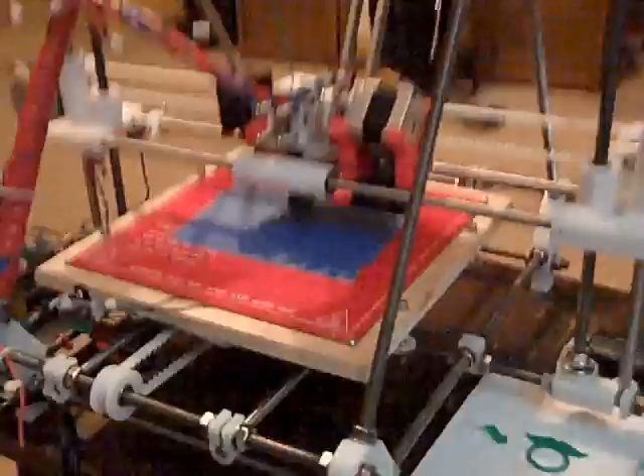Okay, what I'm printing here is a nut. It's in this green PLA, 1.75 millimeter.

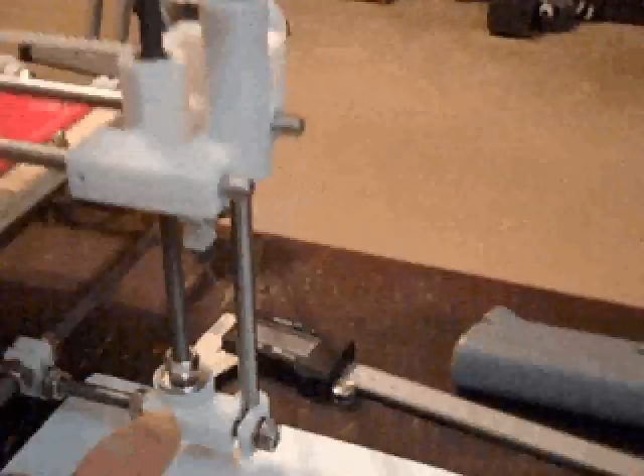From my last video I was talking about adding some jam nuts here to thrust against this bottom bearing. I've installed those on both sides.

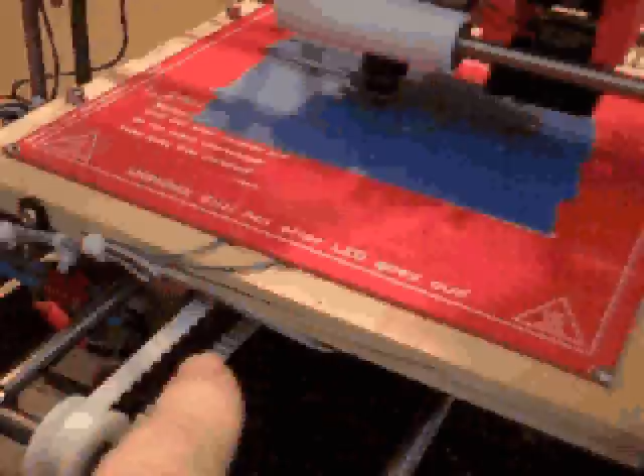I've also got the heat bed wired up and it's working. It's currently at 60 degrees Celsius.

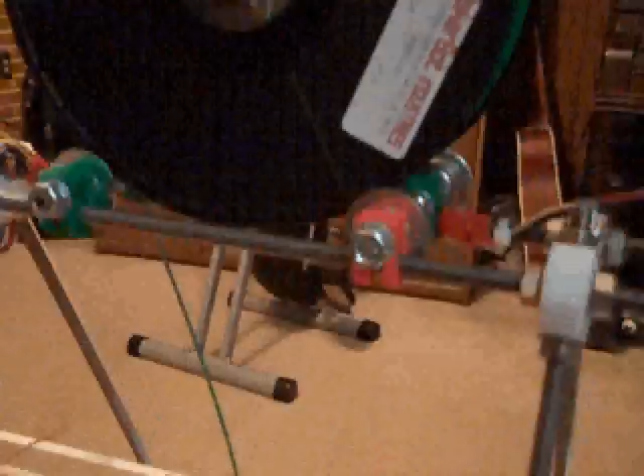I've also created a despooler mechanism up here on top. I've used these rod couplers that were printed in PLA, and I've used some 608ZZ bearings in here, letting the edge sit on those bearings with fender washers on the outside of the spool, so it'll keep it keyed in place. This overhang on the rear of the rods is to allow for expansion.

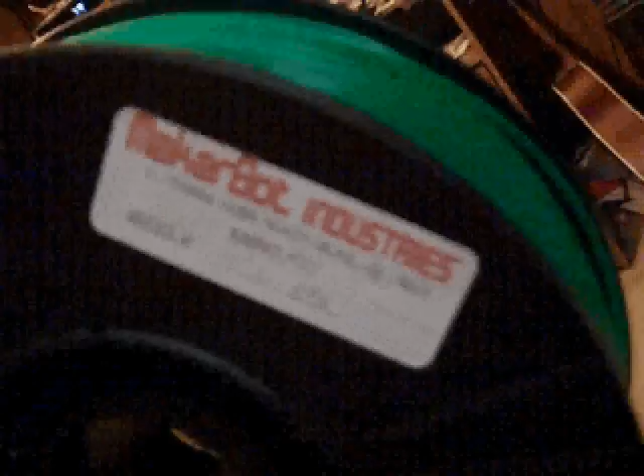This particular spool is from Makerbot. It comes 3 inches by 8 inches in diameter, 3 inches wide. The Makergear spools, which hold 5 pounds of filament, are 4 inches wide and 11 inches in diameter.

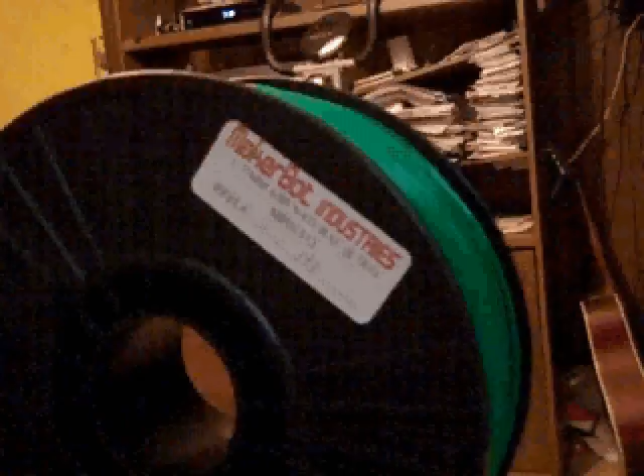So that's the difference in currently using this spool, which actually is full of natural colored ABS. I just wound this PLA on top of it so I could test to make sure this thing would work. And it is rolling, so it looks like it's doing good.

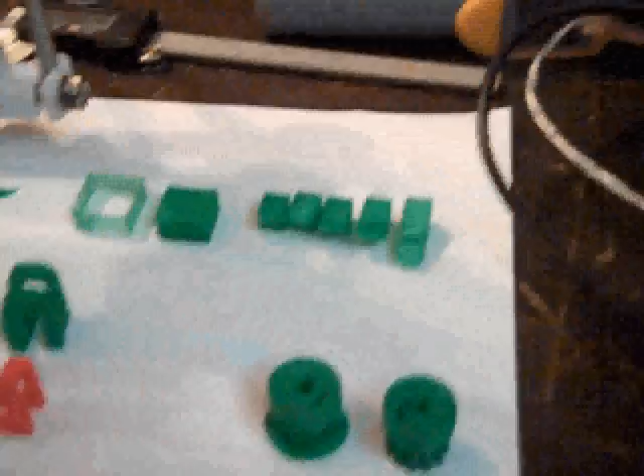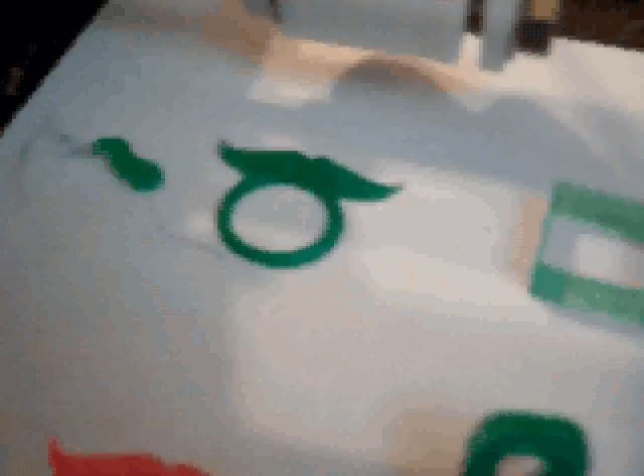I've also got a little display here of previous prints. I mentioned the mustache ring, and actually this little gob up here in the top left was my actual first print, which ended up being a disaster. It was no good whatsoever.

And then I did print a mustache ring, but there was a little flash towards the mustache portion and the ring itself on the left side, and it left the tops and the sides sort of rounded. It's concentric though on the circle, but it didn't satisfy me, so I did print this one in red. I'll talk about it in a second.

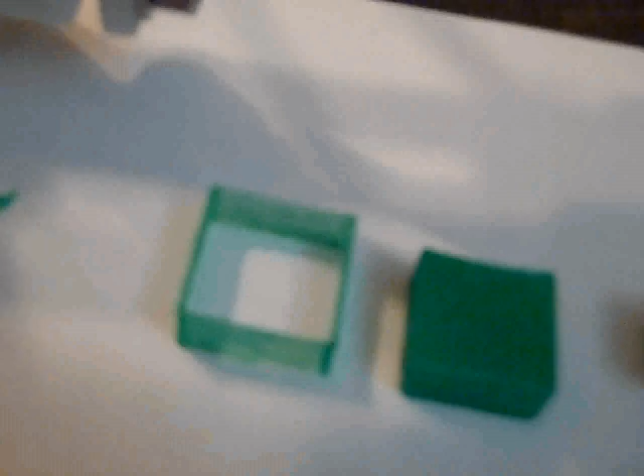Then I went to reprap.org wiki, reprap.org/wiki/calibration, and found a 0.5 millimeter square, and it ended up being like 0.65 millimeter in diameter.

This is a 20 millimeter calibration cube, and it came out really good. It's slightly less than 20.

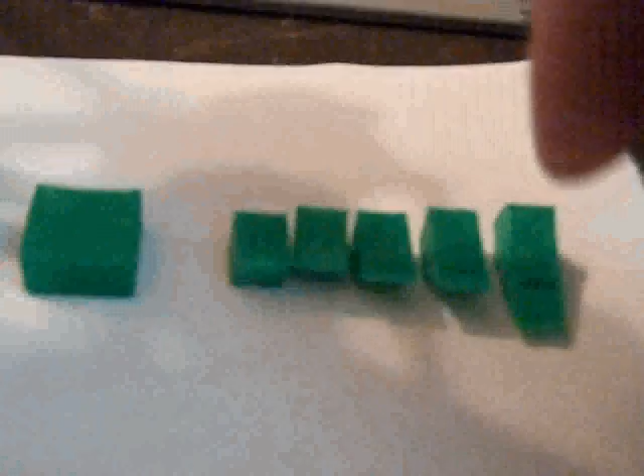And these 5 were printed all at the same time as one print. They are overhang check overhangs, and the way they print is like this. You can see how rough underneath this is, because it's never supposed to print beyond 45 degrees, and that's probably about 60. I think the 45 is right here in the middle, and that one printed fairly decently.

If you can see the reflection of it, it's fairly smooth. But anyway, these were all 5 printed at the same time.

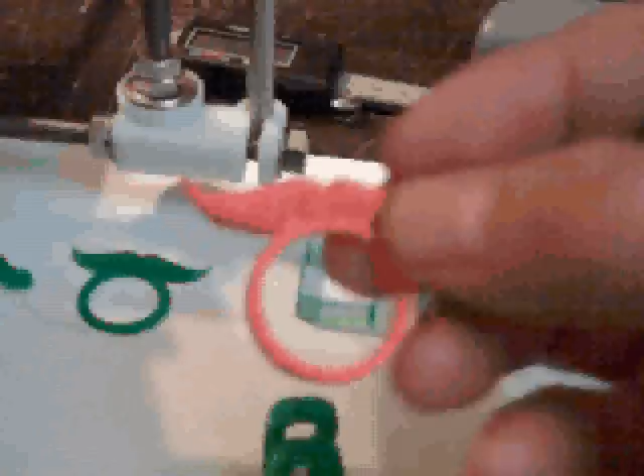I mentioned the mustache ring. Now this one came out, the top is flat, the sides are flat, the contour of the mustache itself is really good. I'm not sure if I'm in focus or not, but anyway, comparing this with the first one, this one came out really good.

These right here are broken because they're PLA, they're not that flexible. And I tried to use them up here on this right here.

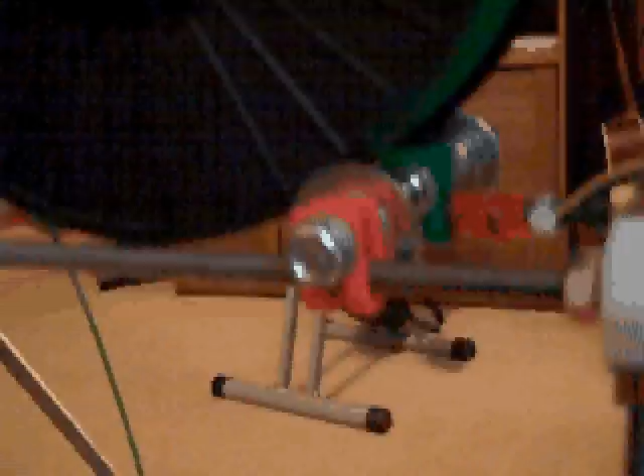Now, right after this, I did print these little babies, the fan mounts. One guy that has this same Brutstruder type system found his PLA was actually melting just beyond the drive mechanism, the gear and the pinch bearing right below there. He was having trouble. It was getting too hot.

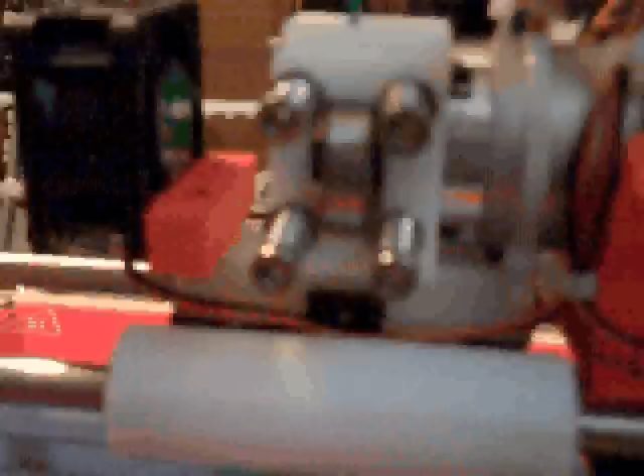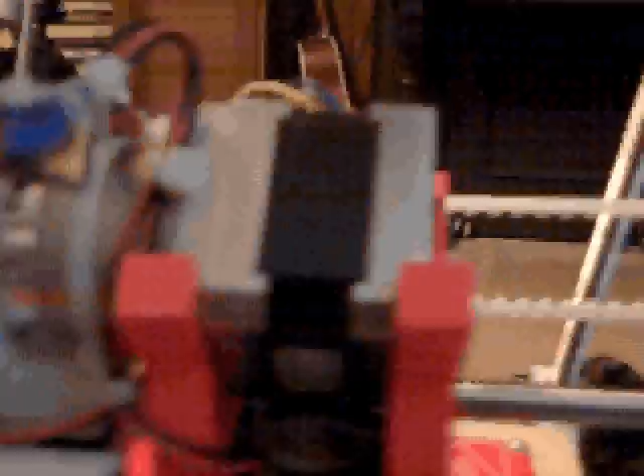He was doing some very long prints, so I decided to put a fan blowing right into that hole where the gear is. Also, he seemed to think the motor temperature was actually going through the gearbox, which is an all-metal design, so I decided to cool the motor off too, so I put a fan underneath the motor.

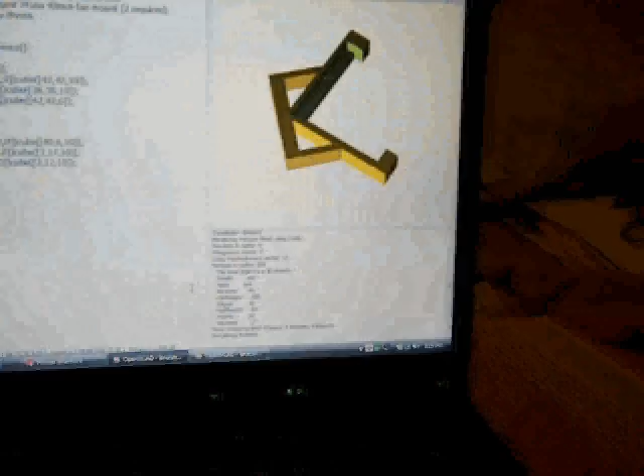Now these right here, I designed these two ends. They are right here. I did that in OpenSCAD, and right here, whoops, right here is the first one, the one that is installed currently. It's just simple. It's got two hooks on the end, and it's got this step that allows from either direction of the motor itself.

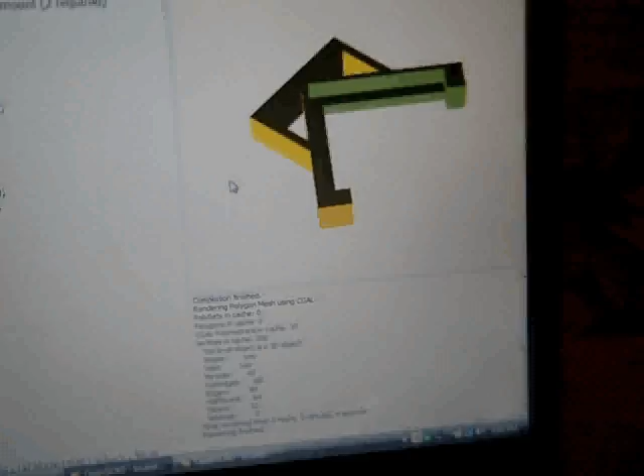And then the fan itself has the 4 screws in it to hold the whole assembly onto the ends of the motor. It's very simple. So I printed 2 of these, but I ran into a problem.

This end hangs down so far that it hits my X-axis idler end right here. So I'm going to have to redesign it. So what I came up with is this version 2 here, which is a 1-piece.

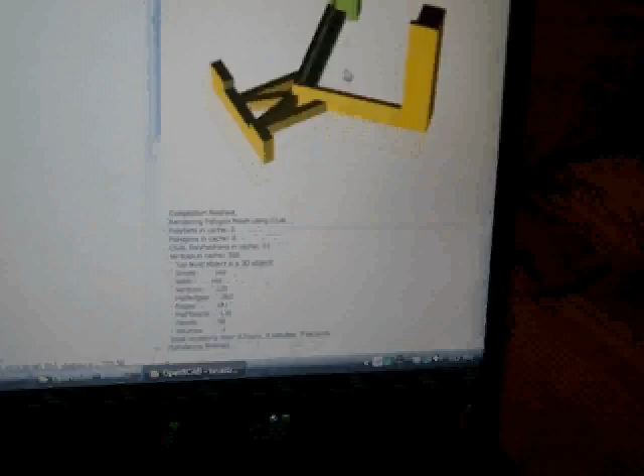Now, this right here currently is what I've got. It's got a hook that's going to hook around the motor horizontally, and it will be sitting on the left side of this motor, hanging down with a fan only bolted with 2 screws, and the right hand side will be free, non-supported.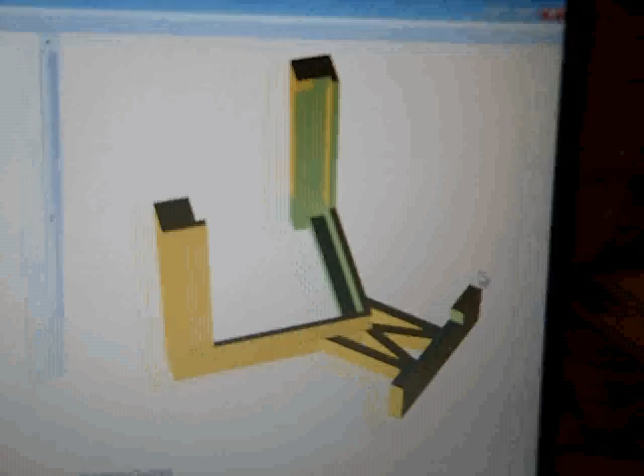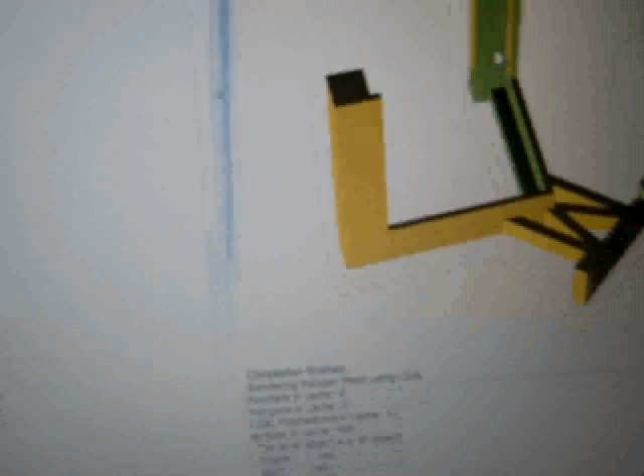So this is what I'm working on right now. I do have a problem getting the exact dimension. I may have to do a test print when I'm pretty confident I've got the right distance between this step and this little catch right up here at the top. I don't think you can see it from that angle. There's a little catch right there at the top to catch the other end of the motor, so that's going to hold it in place.

And then I've also lowered the fan slightly lower. Now it's still going to be above the extruder nozzle, but I'm going to lower it down so it'll go actually underneath here, and I only have to clear it by about 10 millimeters, and then I'll gain back my 200 millimeters of travel there. Currently I'm about 190 millimeters.

I need to turn my heat bed off. I usually, just after it starts printing, turn the heat off on the heated print bed. It's no longer needed. This PLA sticks really well to that blue painter's tape, so I don't really need it.

And what I'm printing right now is a nut. It came off Thingiverse. I think it's called bolt and nut, and it's really not useful for anything. Best I can tell, the threads are something like M25 by 5 millimeters, something like that. It's not really useful for anything. And of course the PLA is not as strong as the ABS.

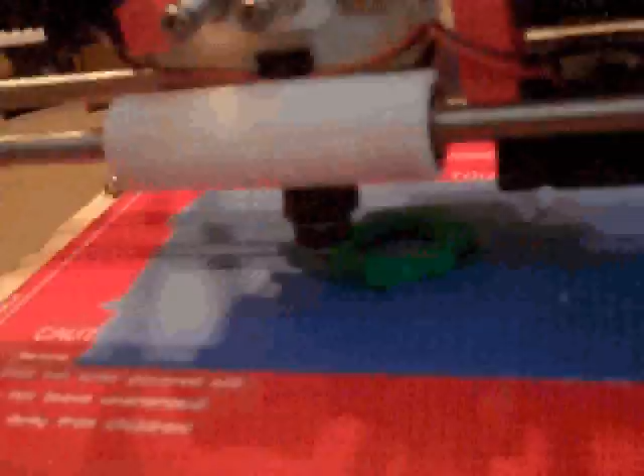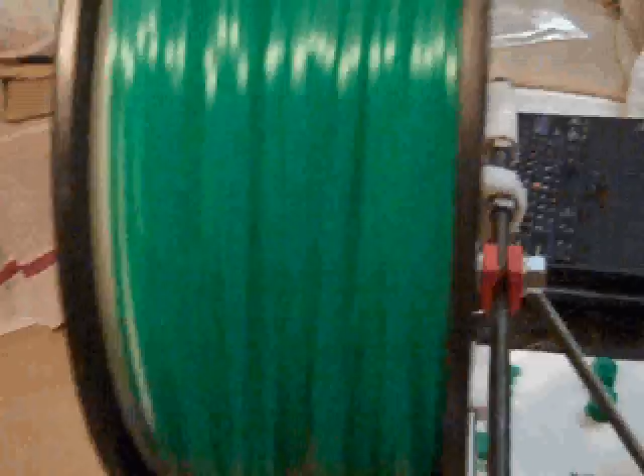Once I do convert over to the ABS, there is some white natural under this green here. I just wound this today. You may be able to see a little bit here on the edge. There's white underneath there. Makerbot sells a 1 kilogram spool, which is 2.2 pounds. Did I say Makerbot? I meant Makergear. Makergear sells a 5-pound spool, but it is larger. It's 1 inch wider and 11 inches in diameter.

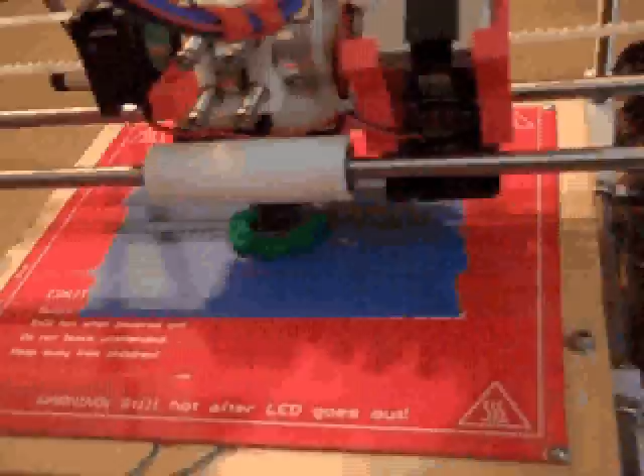So anyway, that's where we're at right now, and I've got a few more minutes here. I'm not sure how long this will take to print. It looks like it's about 33% finished right now, so I'll probably just let it finish the print, and then I'll accelerate the video from here.

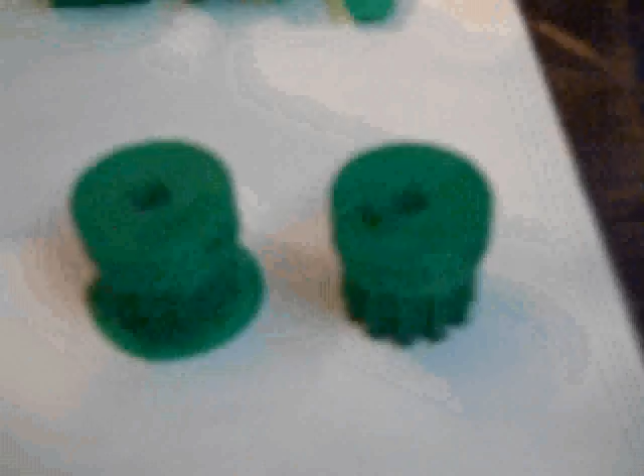Oh, I didn't tell you about my last project from last night. These are the reason it's blackened on the front. I left the print bed heater on too long, and it sort of blackened it right there on the end. And it also rolled it up a little bit.

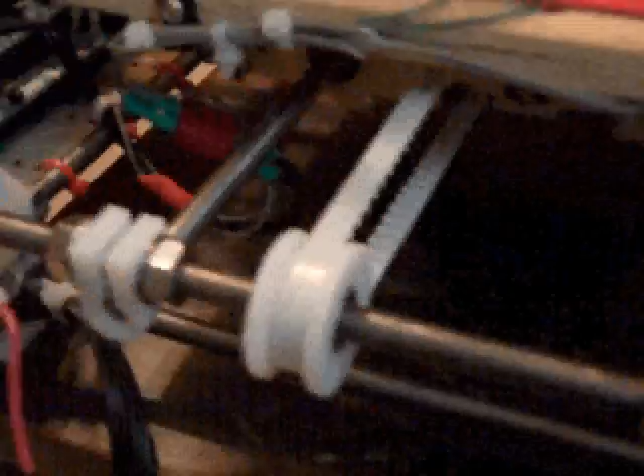But anyway, this is an XL pulley, which is a 0.2 inch pitch. That's what makes these Makergear RepRaps a hybrid, because they're using standard belts and not metric belts. The metric belts would be like a T5 or T2.5 or a GT2 type belt, or 2GT. I'm not sure how that nomenclature is, but anyway, these are standard pulleys. You have 5 teeth per inch on the belt.

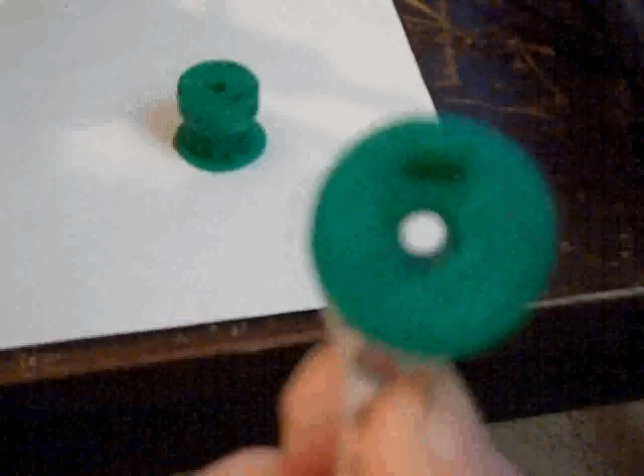It came out quite well. It's untouched from when it came off the machine, and if I can get that in there to show you, can't do that with one hand. It worked out really well. The pitch is perfect on it, and unfortunately it's PLA, so it's not going to be useful. It's not as strong as the ABS. It put a slot in there for a 3mm nut, and then of course you got a set screw hole right here where you can attach it. That's a 5mm hole in the center. Perfect for NEMA 17 motors.

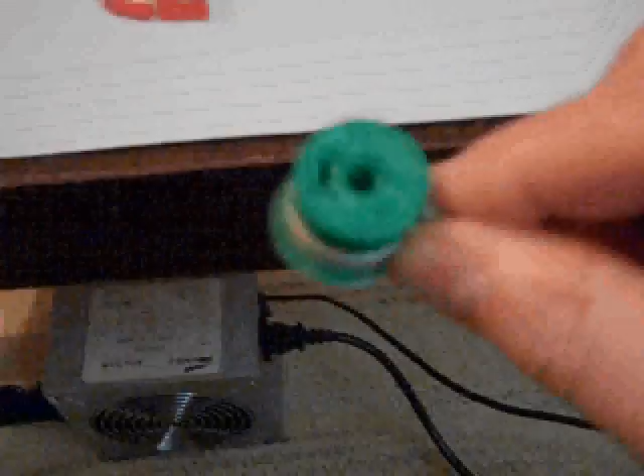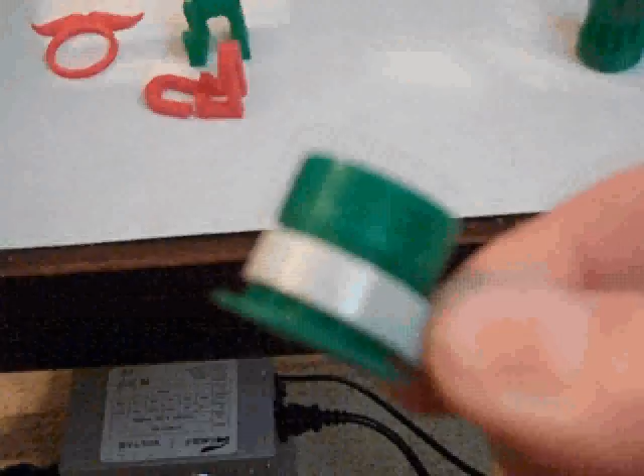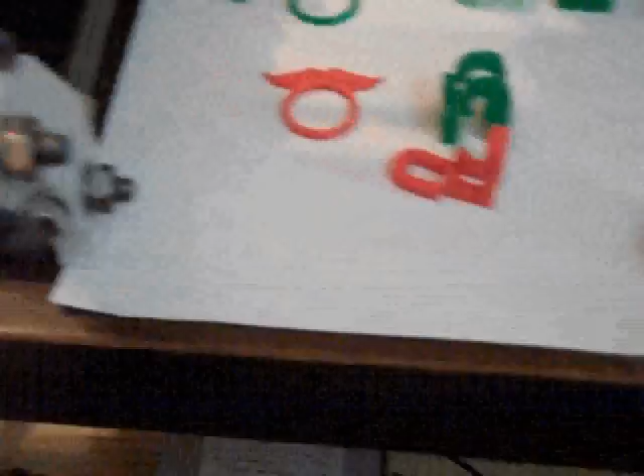Like I say, this XL belt is 0.2 inch pitch, so it has 5 teeth per inch. There's 5 teeth per inch. That's 1 inch right there. So that belt is really good. It's 1/4 inch wide, I think. Looks like it anyway, 1/4 inch wide. I've got some of this that's 3/8 of an inch wide, but this 1/4 is just fine. It's very flexible and works great.

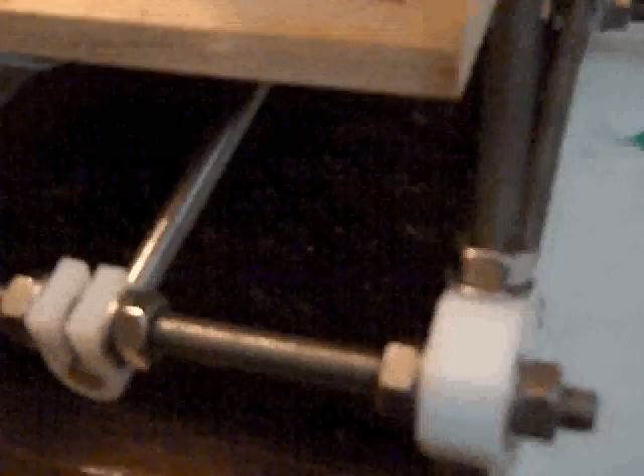Okay, I am just about at the end of my 15 minutes. So I was going to accelerate this, but what I'll do is make another video and show the results of this, plus print the bolt that goes through here. So I'm going to stop right here in a minute at the 15-minute mark.

Anyway, I'm very pleased with it so far. It's done really well. I think I may have fixed a skewing problem between the left and right hand sides of these. I'm no longer pulling on these couplings and the micro bearings in the motor.